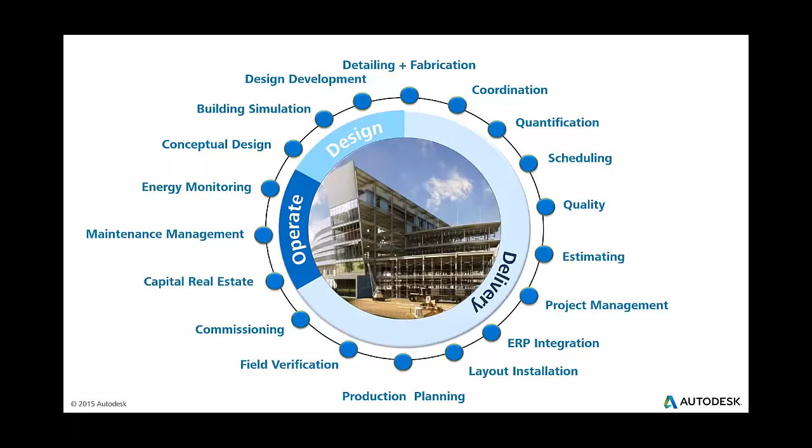When we think about how things function today, there's usually this wheel of BIM, this logical process of stuff moving from stage to stage. Our customers do the same things here, and you can have a lot of different people involved in projects—this is actually 14 different customers associated with this particular project, so a lot of stuff going on. Ultimately, the way it works is like you've got a car that runs on IT labor and expensive hardware—that's basically how the data gets shuttled around. So the system itself is fundamentally pretty broken.

We've gone ahead and tried to address that problem with Collaboration for Revit. The first fundamental problem we've tried to solve is providing access to that information, that data, across the project team, whether they're inside a particular network or not. So let's keep drilling into that.

What we've done is changed the fundamentals of how Revit functions in terms of interfacing with the place of record for a particular model. Today, 99.9% of the time, if I'm doing a Sync with Central operation, I'm a machine running Revit inside of a network, talking to a network store or a Revit Server running inside of a network.

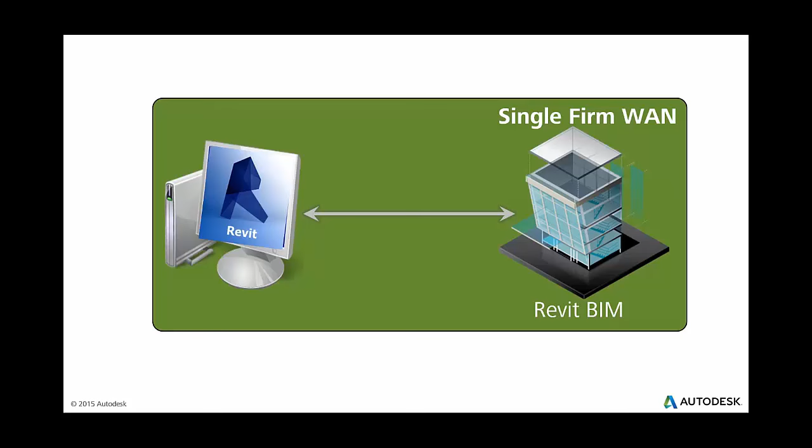What we're changing is we're taking that model and putting it in the cloud—that's the service A360 Collaboration for Revit. It's a modern cloud service built by Autodesk to manage those central models for the entire project team. At a fundamental level, it gets technology out of the way and allows you to have a team architecture where it's not so much about the network conditions you have as it is about how you want to work as a team. So individual sites from a single company could work on the same sets of models without a lot of barriers, or entire multi-firm teams can work together.

In terms of the value that's delivered, first and foremost, it's cloud work sharing—multi-firms concurrently authoring models together.

Beyond that, one of the things our customers have told us—Revit Server is a product that we as a company, Autodesk, don't charge people for, but it's not free, because you've got to maintain servers, pay IT people to maintain those servers, keep stuff updated, update clients with INI files, stuff like that. We were looking for the types of experience you get with something like Dropbox or Box. Most of the time, if you use Dropbox, you don't have to type in an IP address—you just use Dropbox and it works. So we tried to have that kind of existing user experience.

And then finally, the building information models for the project are now located in the cloud, and they're accessible for other cloud services for really useful things. So that's also a value that we delivered here. We think that's really exciting in the long term, and you guys can see in the short term some of the value we can extract out of that when we talk about the A360 integration that we have.

Diving into some of the technicalities—we'll talk more about this in Q&A as well as the demo, but I always like to get through these things at a high level so everyone's on the same page. We've done a pretty big investment around getting the data to the machine before it's needed.

So we do this intelligent data caching. What it means is you have a little process that runs on every user's machine—we call that the Accelerator. What that does is, via deltas, we're never pushing full models across the pipe other than basically the first time you open them. Once it's been opened on a machine, you're transacting in the form of deltas. As others are submitting changes to that place of record for the model—the cloud work-shared model—the deltas of those changes are being prefetched by this Accelerator process. So you're really only working on data cached, and you're only transferring across the pipe those deltas.

So we think that can help improve performance. Looks like my webcam just went off here. Let me do a tech check. Bear with me for just 1 second, guys.

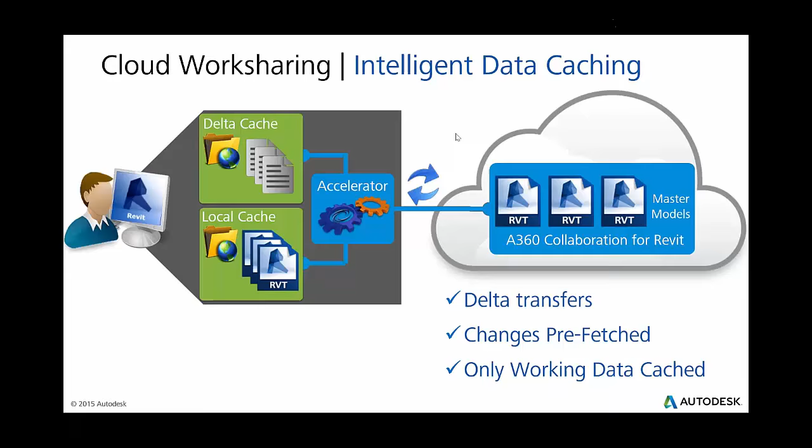So we talked about the data caching that's there. A couple other things to talk about. The first and foremost is the service, the way it functions today, functions under what we call a high-trust workflow. Basically what that means is it's designed for highly collaborative projects where the actual models being authored are being authored by teams that trust each other not to do nefarious or overtly dumb things.

So if I've got a project team together and the structural models are there with the architectural models and the MEP models, if I'm on the architectural team, I could technically open an MEP model and start moving some ductwork. If you're in a project where the dynamics mean you don't trust the architect not to do that, which is kind of overtly a dumb thing, it's probably not the right service for you today. Clearly we recognize there's a desire for that, and over time you'll see a lower trust model delivered here.

But right now, just for full disclosure, it works under a high trust workflow. For the teams that work in that highly collaborative manner, we found it's perfectly viable for them to get their jobs done. And because of that high trust model, at least as designed out of the box, you're basically doing a live link workflow as well. There's a pretty straightforward workaround if you really hate this, but as designed today, you've got the central models linked amongst each other. That's just how that system functions, and I want to make sure you guys are aware of that.

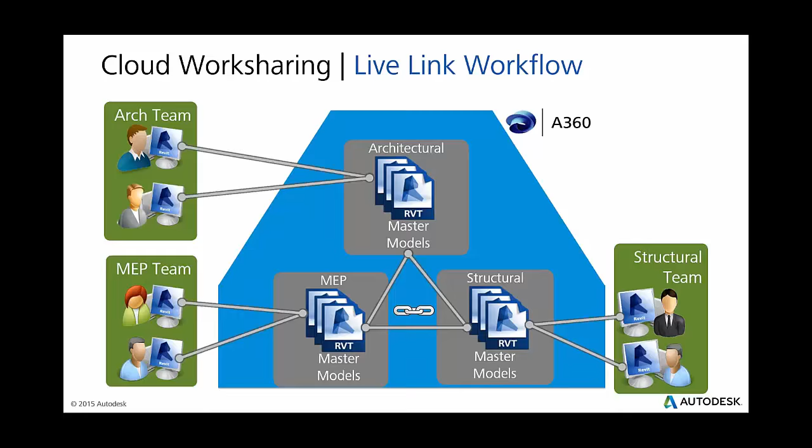And definitely moving forward, we've got a plan to make a much better workflow where you've got major published models that are linked between different teams and stuff. So that's something we're working on, but that's how the service functions today. Once we get into demo, you guys can pepper us with whatever questions you actually have.

The other thing is right now you can use A360 Team, which we'll talk about in a second, to actually contain things like DWGs and other stuff, but it doesn't currently sync down for you. So in many ways you can work directly in Revit on your cloud work shared Revit models, but if you're linking in DWGs, you need to use other means to get those things locally. There really isn't the idea of a cloud link of a DWG file or your Keynote files or stuff. Rest assured, that's something we're working on moving forward, but in terms of the very first release of this service, that's how it functions today.

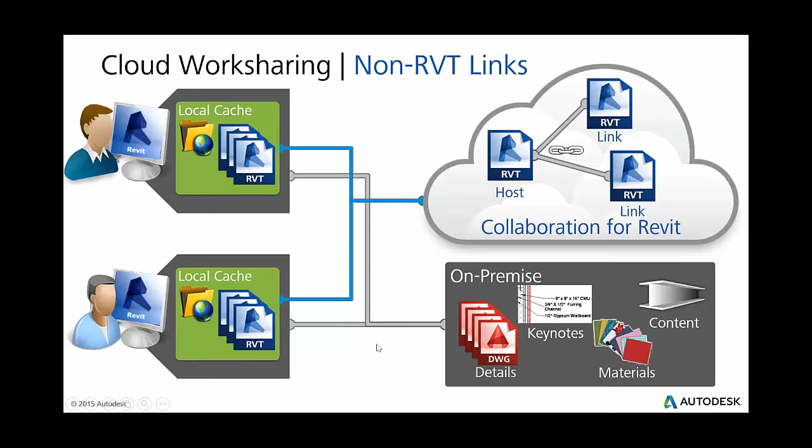So those are just my caveats. As the product manager or marketing guy, I hate making these slides, but it's the reality of how the service functions today. Rest assured, we have a really well-resourced team working to improve some of these things. But I want to make sure you guys are clear on how the service functions, and when we get into the demo portion, you can pepper us with questions.

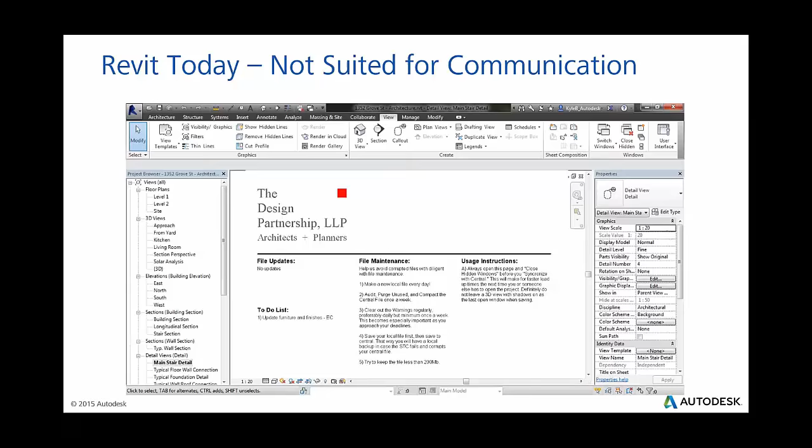Along with providing access to the data, we also want to enhance communication amongst the team. Today people do crazy things like use detail views in a particular central model to post updates for everybody else to read. In a world where I've got like 8 chat apps on my smartphone for communicating with people I know personally, it's kind of insane that you're using a drafting view in a BIM platform to communicate amongst the team. We can do better than that, and there are a lot of companies that do better than that. They provide communication systems that allow people to communicate in real time, but at the end of the day, Autodesk technology is one of the few pieces of consistent technology across the entire project team.

If you're thinking about this as your individual company, yeah, you probably have your own chat system, but it's very rare that every single company on the design and construction team has the same communication system outside of email and phone, which is why that's the lowest common denominator. So Autodesk and our products are really one of the few consistent pieces in the tech stack. So that's reason one why we're kind of investing in here.

And the second piece is when you're using our authoring tools, we can understand what you're working on, which means we can make it really simple to connect with others working on the same thing. And so it all comes together with an in-product chat tool. I can demo that in a second, that allows synchronous communication, so real time. It's not like email where it's like, hey, I sent you a message and get back to me whenever it works. It's an instant message, so there's an expectation of instantaneous communication.

The tool also knows who you are and what you're working on, so it's able to understand, hey, you're working on this model, which is part of this project. Here's the other people in that model right now. Here's the other people working on models linked into your project, and then here's other people that are online that aren't working on your project, that idea. So that contextual awareness we think is really powerful.

And then finally, we've integrated an activity feed, or the timeline as we call it, into the actual communications tool. So you're seeing when people are syncing with Central, get a little animated icon when that happens. We'll demo that in a second. So that's kind of a pretty cool tool in that it's connecting the team, and it's also making available information about who is doing what when.

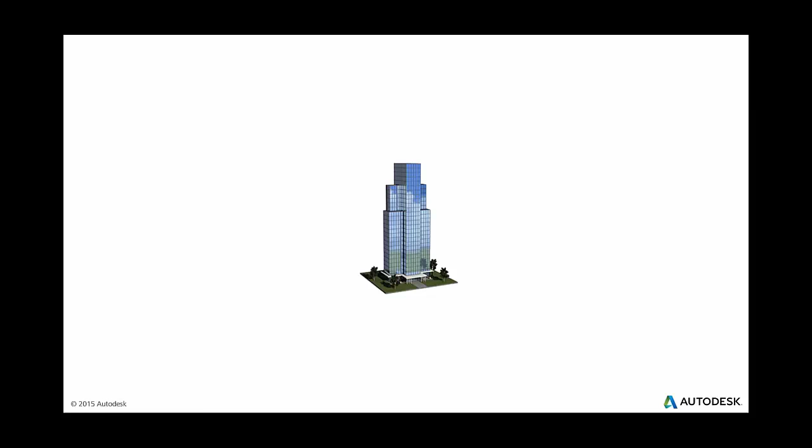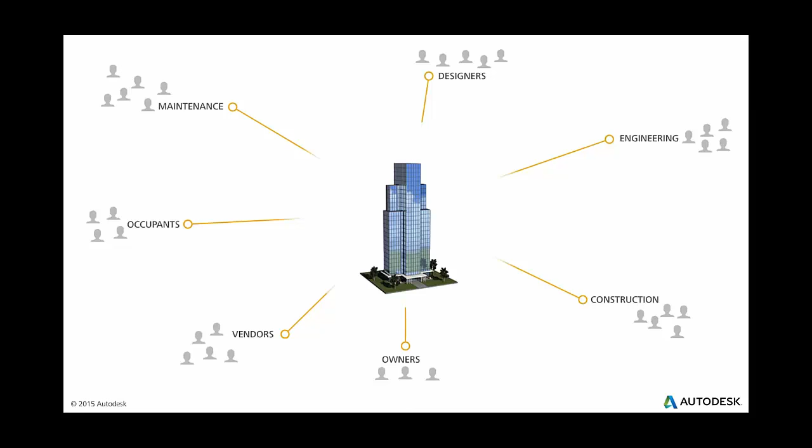So traditionally, Autodesk, we only talk to the designers and the engineers on the project team. But there's a lot more people on the project team. And they're not typically using our stuff unless they're interfacing with PDF outputs, or they're part of screen shares where some Revit person is driving. So there's a much broader project team. And it's not just BIM data, it's a ton of different data. It's a whole boatload of spreadsheets. It's all kinds of PDFs. It's all kinds of Word documents. It's all kinds of stuff. And that stuff is not typically touched by our services.

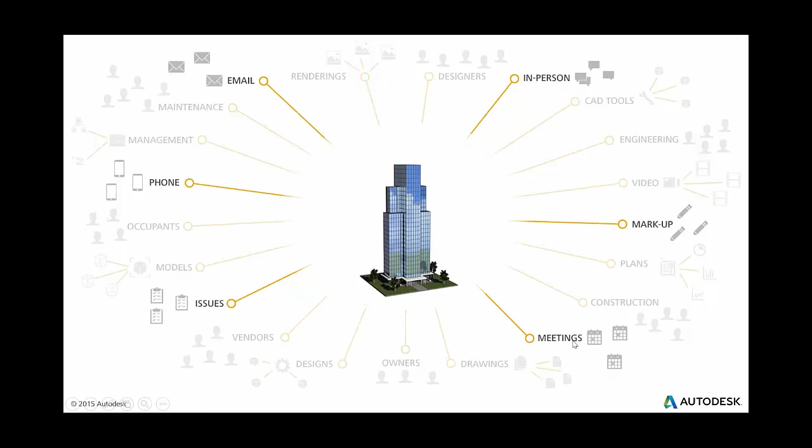And then it's not just that; there's a lot of activities and interactions going on, people talking, people marking things up, people having phone calls, and A360 Team is all about centralizing all of that information. So we like to think it centralizes the people, the data, and the activities, and it puts the project at the center of that. And that's really the key value we think of here.

I mean, there's a lot of tools out there that do this sort of thing, but typically the anchor is like a folder. You know, the file folder as an analogy to contain all the stuff, it's just the data. It's not everything. And the project is really that anchor within A360, and we're excited about that. We think it's a powerful thing.

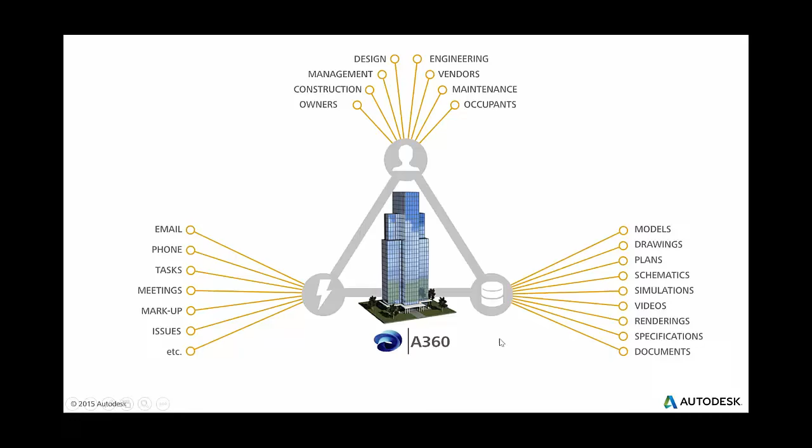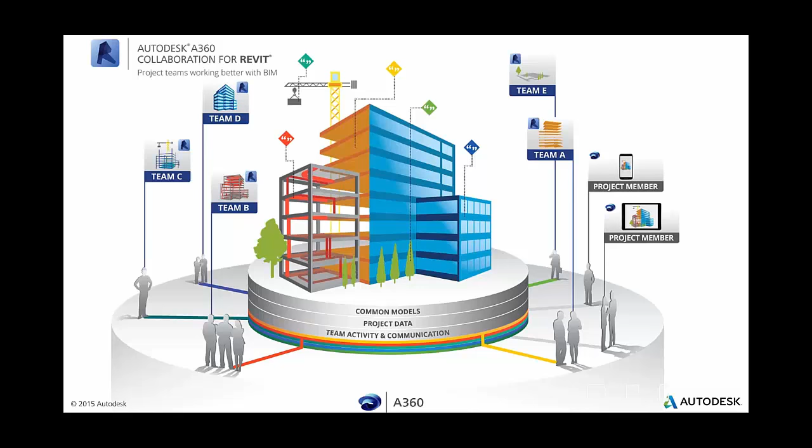And when you add on collaboration for Revit, we now have cloud work shared models that are playing into that system. We have the ability for people to chat with each other, at least inside of Revit for now. So that adds even more value.

So let's talk a little bit about the actual A360 Team experience, knowing again that we can demo when you guys have questions. You know, we like to think you can share, view, and search any of the data in the project without requiring specialty tools. So without having Revit on your machine, as long as you have a modern web browser, you can go ahead and start viewing Revit models on your web browser and flying through them and making comments, eventually doing things like markup, and also searching.

So as we get the data ready for viewing on a web browser, we're also cracking open all the elements, dumping all the parameters into a search index so you can start searching stuff as well. And so we think that's really powerful in the longer term.

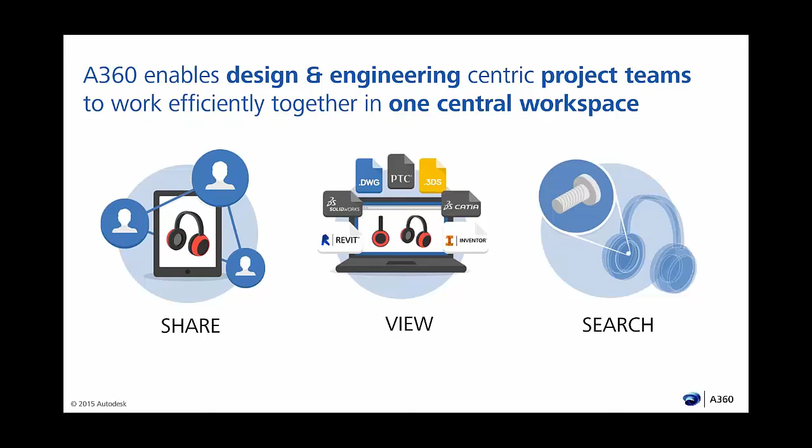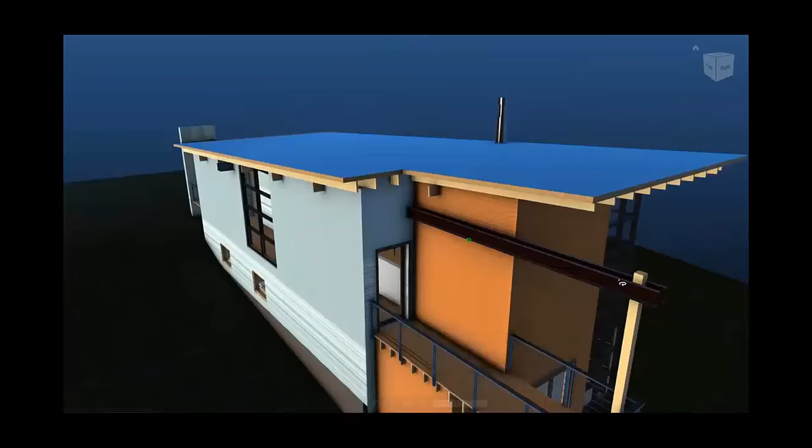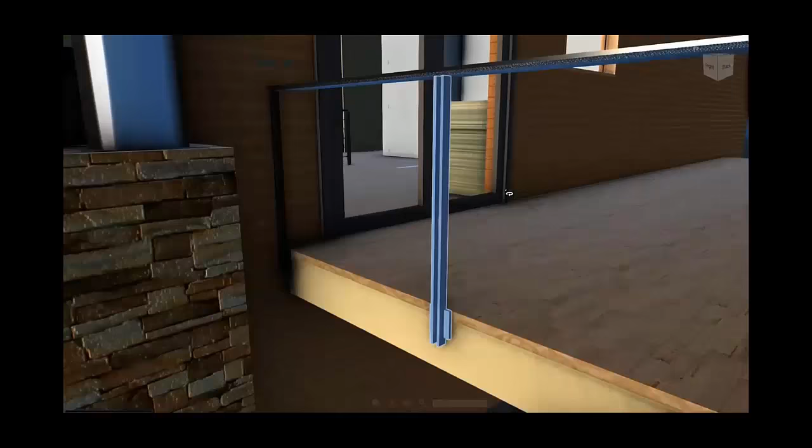Moving along here, this probably won't translate well, but I've got a little video here that is actually the experience in viewing. I'm going to demo this in a second, but I just love this video because you're in a web browser, but it feels like you're not. Yay, modern technology for allowing smart dev teams to build these types of experiences, but you can drill into individual elements, you can see the properties, and you can even load up models like this, which, thank you very much to the Beck Group, one of our customers, is one of their BIM building information models.

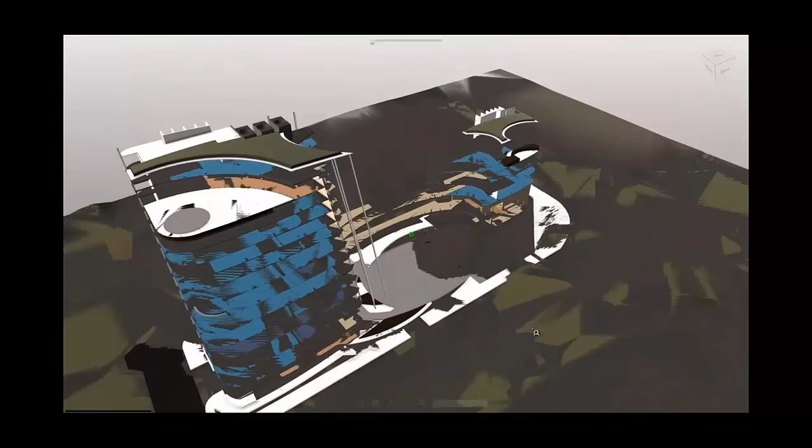There's 54 million polygons in Canvas. So if you've never had a reason to get a 64-bit version of a web browser, this web viewer may be the first reason for you to do that, because you can load up huge scenes and actually render them and make it look gorgeous. So we're really excited about this technology. And we think the idea that anyone on the project team can be engaging with the model with this kind of a rich experience without requiring them to be dangerous in Revit, so to speak, is really powerful.

So let's talk about how Collaboration for Revit works. We used to call it Skyscraper, I slip sometimes. The way the system functions today is when you do your initial sync with Central, you get a version on A360. As teams are syncing with Central from there, you actually don't get a version on A360. You get it when you push a version out there. So you go to your Manage A360 Models dialog, you hit the little button, and that pushes the data through what we call internally our derivative service. It's the thing that makes the data ready for viewing on your web and mobile device. And so that's how the service functions today.

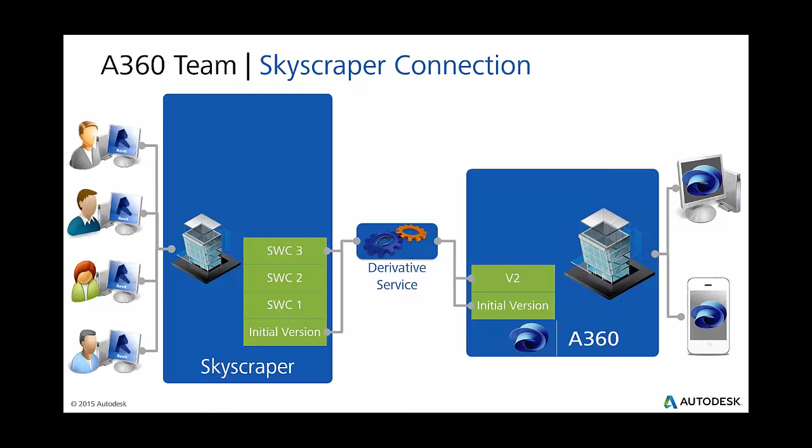In terms of the project structure, typically a single company will have a hub. It's kind of a site, the actual domain or URL that you go to that contains the project. Within that project, you have members and contributors. The members are host company employees who are members of that hub, people that the host company is paying for to be part of the A360 project. Then you've got employees of other companies that are in there as project contributors. It doesn't cost any money to include somebody as a project contributor. So if you're the firm hosting the project, you can invite everybody from all your consultants, and it's not going to cost you any more to have them working in that project.

And then there's host company employees who are just in that project. So along with those project members who are paid, you can have people in as project contributors. The big difference is if I'm a contributor in a project in a company's hub, I can't see any other projects in that hub. So if I'm part of the MEP consultant, I only know that this project exists. If the host company has 50 other projects that may have confidential stuff, I have no ability to access them. So that's the traditional project structure.

Moving from there, there's three things that we've brought together: accessing the project data, enhancing communication, and connecting the entire team. And all those three things come together for A360 Collaboration for Revit. So for those of you wondering what this thing is, that's what it is. Now we're going to talk a little bit about some of the capabilities, do a bit of a demo, and go from there.

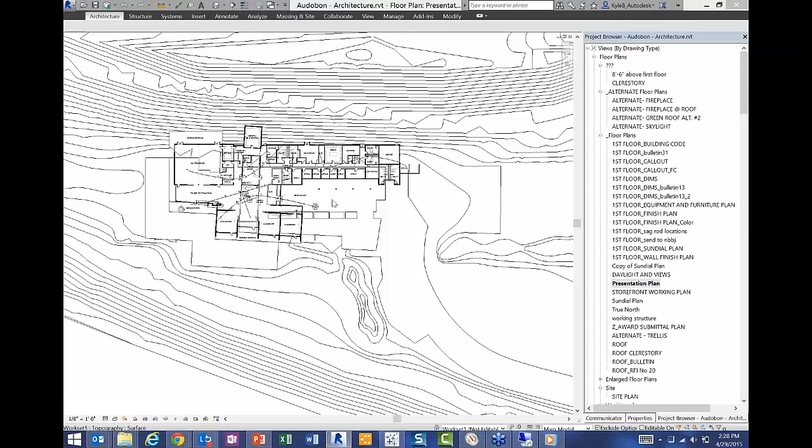So anything else, Bud or Nisha, before we get started in the demo here? I think the rest looks pretty good. Okay, cool. Well, keep asking questions, guys. Like I said, we got a deep bench today, so you guys can probably get your questions answered before it even gets to me. So let me minimize this.

So this is a version of Revit 2015 that has the add-on for Collaboration for Revit installed. So just as a general note here, this service runs on effectively the bleeding edge of the released code for Revit. So to make it work, you basically have to have the latest update release of Revit, so the latest Revit code for 2015, plus the add-on that really makes this magic happen. So over time, I think that's going to start to change, but right now, we're developing with updates every month, and because of that, you need to make sure that you're on the latest code for everything to function. But that aside, it's a regular version of Revit.

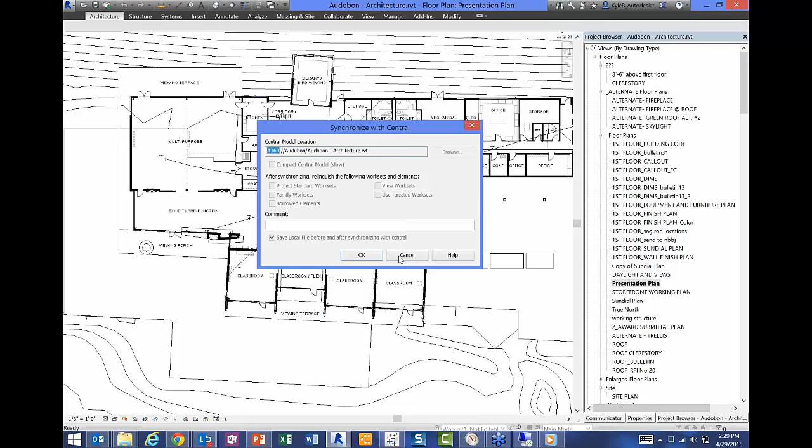I'm actually working on a cloud work shared model here. So how can I tell that's a cloud work shared model? If I go to Synchronize with Central, the path is going to show up as A360. So I'm actually in a cloud work shared model. If I wasn't in one and I wanted to join one, I could go ahead and do that pretty straightforward. So if I go File Open here, oops, double click, my bad.

There we go. My file open browser, I'm going to see an A360, the cool whip icon as I lovingly call it. And what's going to happen there is basically you're going to ping into A360 Team and ask, hey, what hubs am I on? What are the projects in that hub? And then it all gets grouped together in this list. So this is for Kyle Bernhardt. This is for my personal Autodesk ID. These are the projects I'm in.

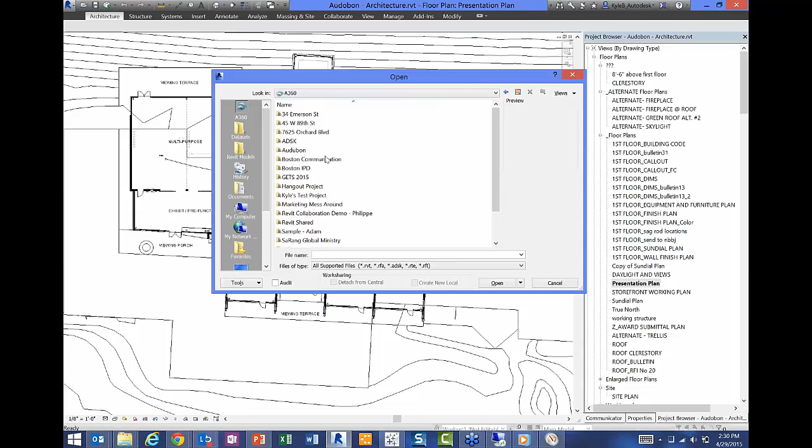So I could drill into any one of these projects. These projects contain cloud work shared models. I happen to be on the one inside of Audubon. That was the one I picked, so I only have 2 cloud work shared models up. Looks like one of our sales guys added a 3rd one, but regardless, that's kind of how it functions. So I don't really have to care about network paths or anything else. I just hit A360 and it's going to tell me what projects I have. So that is also a common question we have with people that are familiar with Revit Server.

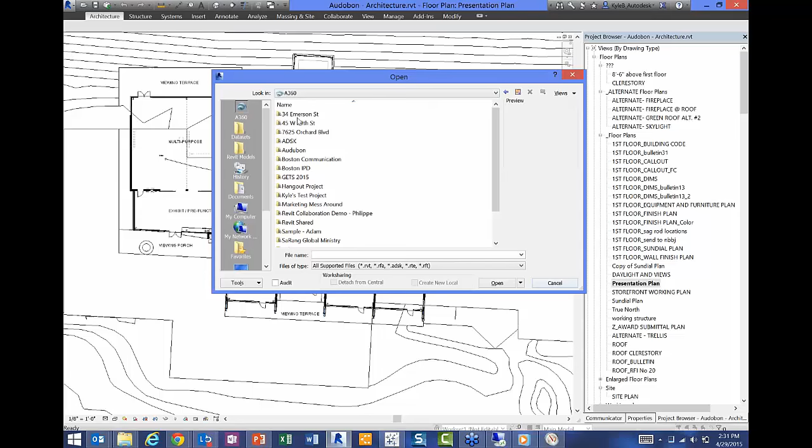A360 allows you to control who is a member of a project. So if I'm working on one project for a company, I can't view, see, or literally do anything with any other project going on in that company unless I'm also a member of that project. So you've got, not super fine-grained, but pretty good control over who can see what data. So that's what determines which projects show up, and I can open up models from inside of there.

If, for example, I had a local model, and I'm going to shoot from the hip here a little bit, so bear with me. Whoops, wrong one. So if I'm going to go ahead and open up a project, back to file open, let's see. I'm going to open a local version of a model.

So right now I'm locally opening a model. This just sits on disk here. If I wanted to get this thing up into the cloud, a common question is, hey, how do I get it there? Can I just upload it to A360 Team? The answer is not currently, and the reason why is we need the Revit application to get it up there right now. There's opportunities in the future to potentially change that, but right now you've got to use the Revit application. So it's a one-time deal to get it up in the cloud.

So after this model locally opens, I'll show you that workflow, although I won't go through the motions to get it officially up there. But people always ask, how do I get the data? So let me show you guys that as we go. So this is a local model. It's finally loaded, it looks like. Almost. There we go. So it's finally loaded here, and we're going to go ahead and collaborate and push this thing up into the cloud.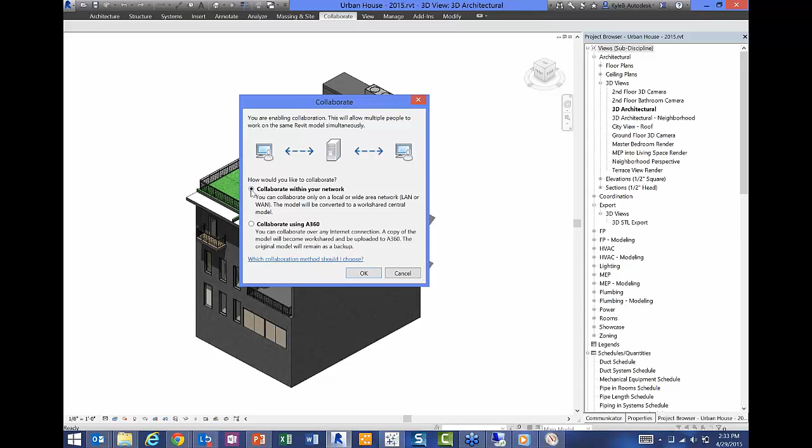So what we do is we go to our Collaborate tab, which is where you go to start worksets historically on a model. But with this service, there's a bit of a change. So you see this option that's called Collaborate. And I've got to hit this button before I can enable worksets. And so the way this works is we kept the existing functionality as is. So if I keep the radio button checked for Collaborate within your network, that's worksharing like it's always been. Nothing changes at all. If I choose to collaborate using A360, this is the fork in the road where we've gone down the fork that says make this a cloud workshared model.

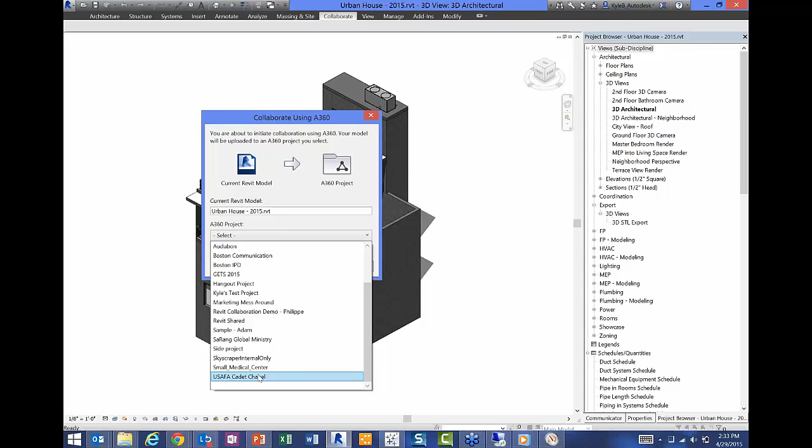So when I hit select, this is a list of all the projects that I'm a member of. Doesn't necessarily have to be projects that have Revit models or cloud workshared models in them. This is just the projects that I'm a member of. So I'm going to say Kyle's test project. If I hit initiate, that's going to start the process of enabling worksets, uploading the model to the cloud, creating a cloud workshared model from that, and then getting a local cache working for me as a user. So that's kind of the whole process if I hit initiate. I'm not going to demo it, but hopefully you guys get the gist.

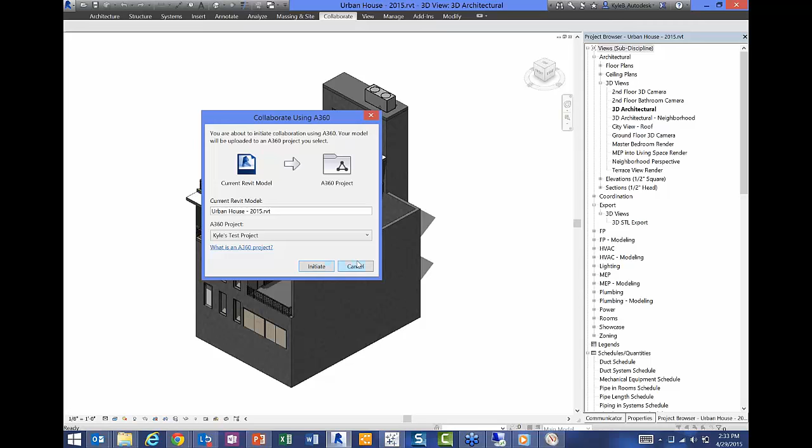So the process is I'm going to do that for all the models in my project if I'm migrating a project. Once I'm done, I build linkages between those models. So, assuming this model is called Audubon, there's an architectural and a structural model. If I'm migrating that project up to the cloud, I would go one at a time, migrate the structural model, migrate the architectural model, and then since there were links before, I need to remap those links because they used to be local links, and with Collaboration for Revit, you need to have cloud links. So there's no local Revit model linking with Collaboration for Revit. You need to use cloud links.

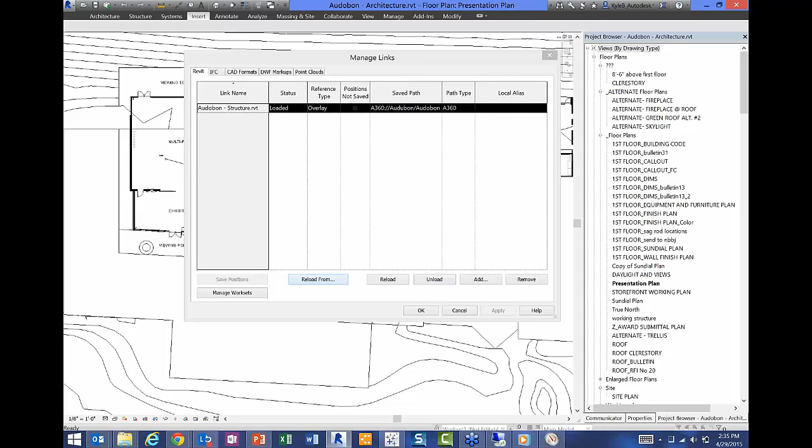And so the way you do that is you get each model up into the cloud, and then you hit Reload From. And then from there, you're going to be presented with all the models in your current project, and you select from that one. And that's effectively going to create a cloud-to-cloud linking between the current host model you have and the link model. And so that means that anyone on the project team, no matter where they are in the globe, as long as they have an internet connection and they're signed into Revit, they can start working on those models. So cloud-to-cloud links are awesome because you don't have to worry about paths anymore. It all just kind of works. So that's that piece around linking and getting models up there.

So I'll stop here, Bud. Are you seeing any questions coming in about the whole getting models into the cloud topic that you'd like to cover before we move on to other topics? Right, yeah, one of the questions was how do the links get updated? Do they update dynamically, or do you have to do anything to update the links?

Yeah, it's a great question. So we haven't changed the functionality in Revit to handle that. So the way it functions is in a traditional workflow, you're linking central to central. So if I'm working on a host and I've got two links, right when I hit model open for the very first time, that is when I load the latest version of those linked models. And that Accelerator would have already prefetched the deltas so that it's a local operation to build a fresh state of each of those links.

And then I'm working on that state of those links for the rest of my Revit session, unless I happen to hit the reload option. If I hit the reload option, that's going to then force a reload of the latest state of the linked model. If I sync with Central, that doesn't reload links. So syncing with Central doesn't reload the state of links, only hitting the reload button does.

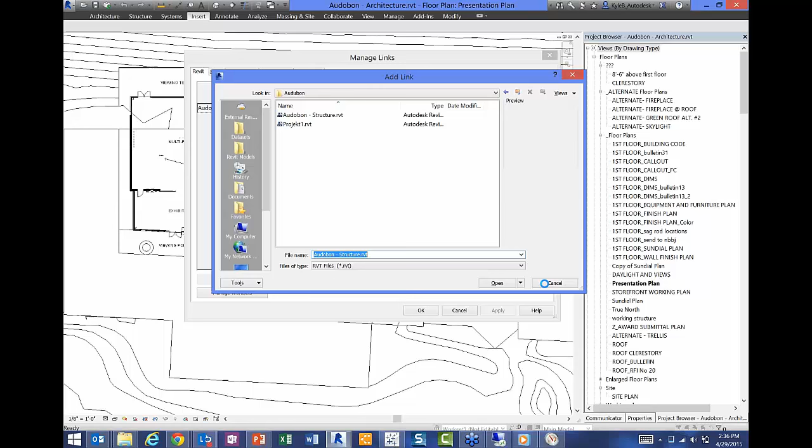So as a general rule, you're always getting the latest version of your links when you hit model open. And like I mentioned earlier, there's some cases where you may not necessarily want that given the dynamics of the teams and the project. And in that event, what you end up doing is you have a dead version of a model that is linked in.

So just to give a concrete example, because we're demoing, let's demo here. If you hit Save As, that creates a detached local version. So if I'm the architectural team and I want to cut a version that I want my structural team to link in, I'm going to go ahead and hit Save As. I'm going to bring that locally, and then I'm going to initiate collaboration and onboard the model back up with

a different file name. And the version that I just brought back up, my architectural team isn't going to work on. The architectural team continues to work on Audubon Architecture, but there's a new version called Audubon Architecture Link that the structural team links in. So the structural team now has a static target that they're linking in.

It's not going to change until my team says, all right, I've got my architectural model, the live version, at a state where I'm going to save as again. And then I'm going to onboard that new version up, architectural link again. And then that's going to replace the old version that was there, that dead link, and then the structural team sees it update.

So, is it super smooth and integrated? No, not yet. We want to get there. But quite honestly, it's probably no worse than taking a version and throwing it up on an FTP site once a week. So that's the function around links. So any questions on that? Do we see anything coming through the wire to drill into that?

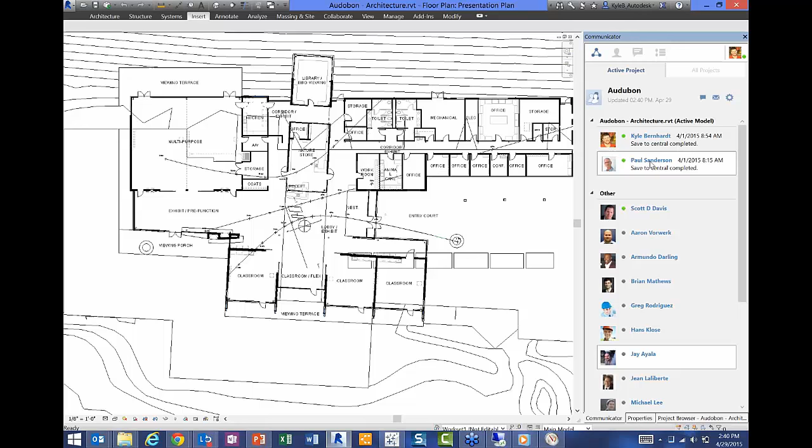So over on my other machine that I've remoted into, I can switch over to him, and I'll do that in a second here. So Paul's in the same model as me, and here's the other people in my project. Only Scott Davis, one of our technical sales folks, is currently online. So if I see the green dot, I can reach out and chat with someone. I know Paul's there, so I'm talking to Paul. Paul, I'm about to make major changes.

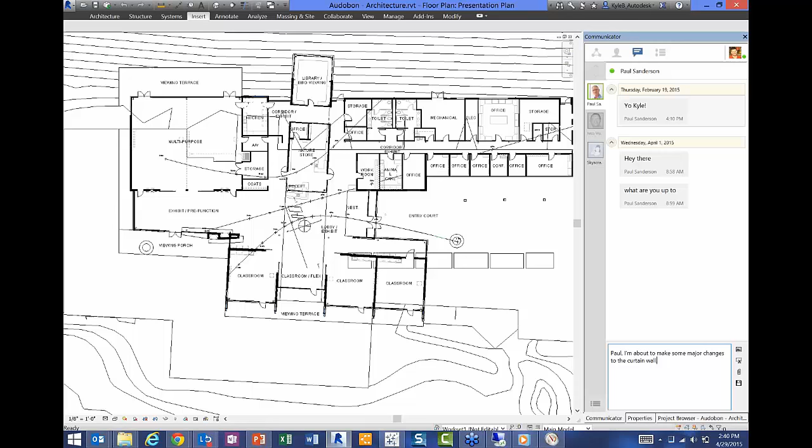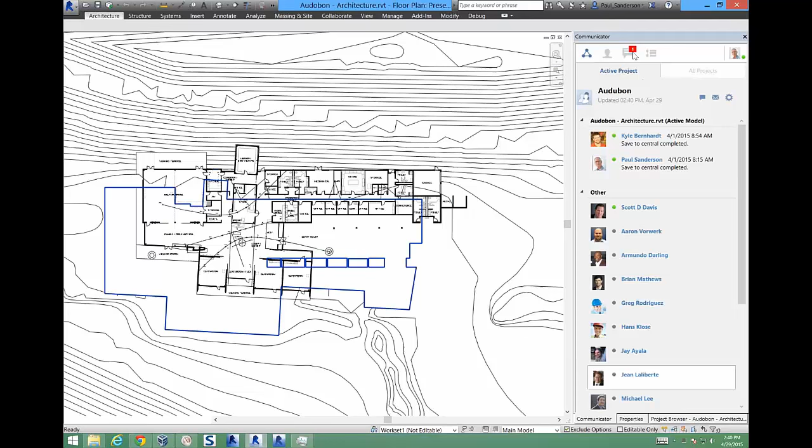So I send a little chat message over here. If I switch over to my other machine, I'm now Paul Sanderson, you can see up top, and I've got a chat message waiting for me. It sees that I'm Paul, inside of this model, and there's a chat message waiting. Click on the chat head, and there it is. So you can chat back and forth. That contextual awareness is pretty straightforward.

The other cool thing I want to show real quick is the process of syncing with Central and that activity feed. I'll show that right now.

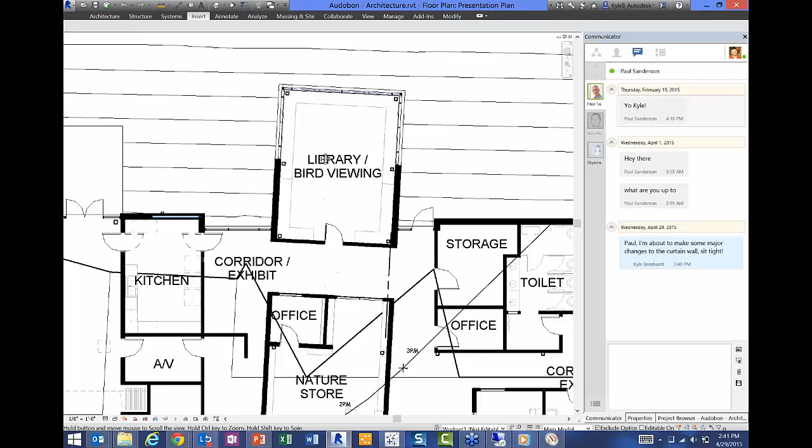I said I was going to make some changes to the curtain wall, and since I'm a mechanical engineer and not an architect, you don't want me to do that, but I'm going to do it anyway. Let's make some changes, changing the curtain wall from a storefront. Let's see if I get another one. Storefront 2. Hopefully this doesn't break too much. So I'm winging it here.

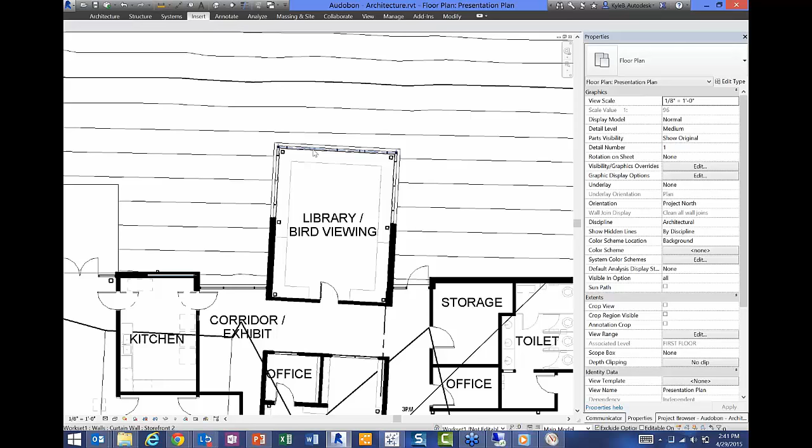So I've changed the type of that curtain wall, and I want to submit it. The same workflow applies as traditional Revit work sharing. I need to sync with Central, and I can choose whether or not to push stuff in. I can also leave a comment, and I'll show in a second why that matters.

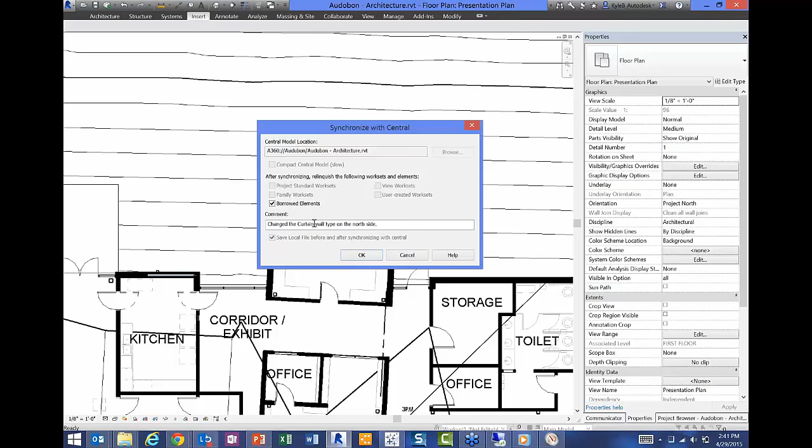I've gone ahead and triggered Sync with Central, and now Revit starts transacting with the cloud. If I fire up Windows Resource Monitor, aside from sharing my screen, you can see the bandwidth associated with that, I'm seeing that Revit has now started transacting with the cloud. That's not something inside of my machine, that's Revit connecting with and communicating across the cloud.

The cool part about this: if I switch over to Paul, Paul knows that I'm syncing with Central. This is a nice little improvement I really like. You see this little animated icon next to the timeline? That tells me that someone in your model is syncing with Central at that very moment. If I click over to that timeline, here's my Sync with Central history. You're seeing that Kyle is syncing right now, and here's the comment he made about it.

We really like this, and customers are really liking this idea of more open communication. The cool part is this isn't limited to people in your company. Of course, there are perfectly good reasons why maybe only people in your company work on a given model, but technology isn't in the way anymore. You could have a sprawling team across multiple companies and networks, all communicating in the same way. It's exciting stuff, and that's the main part I wanted to show here.

A few other things—actually, I'll stop and take questions that might exist around this Communicator tool before we jump into some of the administrative capabilities of the service. Any questions coming in around the Communicator?

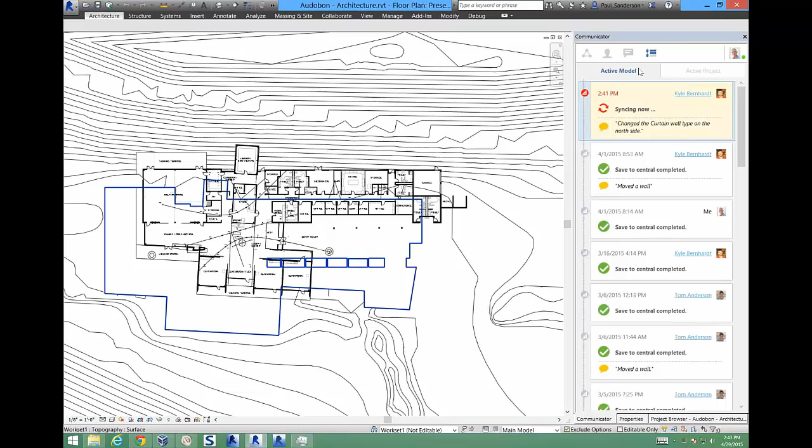That's a great question. The history is definitely contained in a cloud service, and for me as a user, if I sign in to another machine with my identity, you're going to see my chat histories come with me—my active chats and the history. So the conversations are definitely stored in the cloud. Most people tend to ask this question around auditing, having an audit trail around decisions. A lot of times communications around projects need to be maintained under a certain level of stringency.

That is not what we're currently doing. I don't want to oversell it. If I wanted to, I could save it as a text file—I could save a chat history and say, hey, you told me this on this date, here's the chat record for it. So that functions, absolutely, but it may not necessarily be exactly what people are looking for, and we're looking to improve that over time. Go for it.

Just one other quick question, it may or may not be related—I'm not a Revit guy, as you know. The guy wanted to know about dealing with large point cloud data. Does Revit deal with that?

Oh yeah, Revit does handle that, good question. Revit as a platform handles large point cloud data better than any other BIM platform on Earth, that's for sure. We use our Recap technology. I suspect what people are asking is, can I cloud link a point cloud? The answer is no, not currently, and that's a really challenging technical problem.

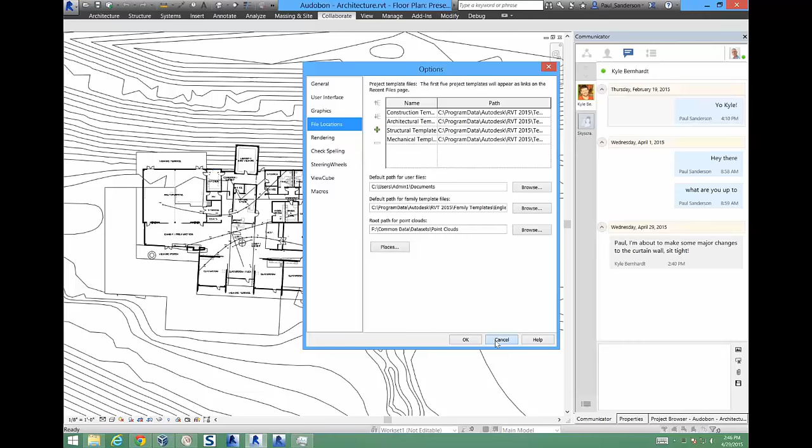Over time we'd definitely like to have cloud-located point clouds, but right now, with point clouds being 75, 80, 100 gigabytes of data in the worst case scenario, we haven't figured out a good solution to stream that data down. Most people don't want to be downloading 80 gigabytes of data across every user's machine. So it's a work in progress.

A couple other things I want to show about the experience here before we talk about the roadmap: we have this little administrative console. I'm working in Audobon, so I can drill into that, and here's where I can do some administrative tasks. We talked about pushing models to A360 Team, so I can go ahead and do that by clicking this button to publish the latest.

But I can also do things like rename my model, view the versions. This is a common question: basically every single Sync with Central in the entire history of the model is saved in the cloud, so you can always restore back at any given time. That's a pretty valuable thing to understand, you don't have to worry about some local archiving system.

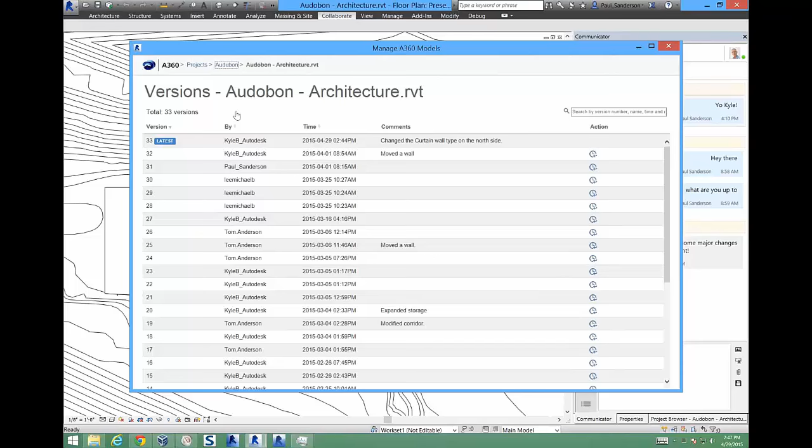As our cloud service provider tells us, the scenarios in which we will actually lose data, a hurricane might come by the region where the service operates and this whole region may go down, but the scenarios in which we actually lose data are ones where you probably don't care about your job anymore, you'd probably care about the future of the human race. So the data's there, the service might just go down if a hurricane comes through Virginia, which is where we're located.

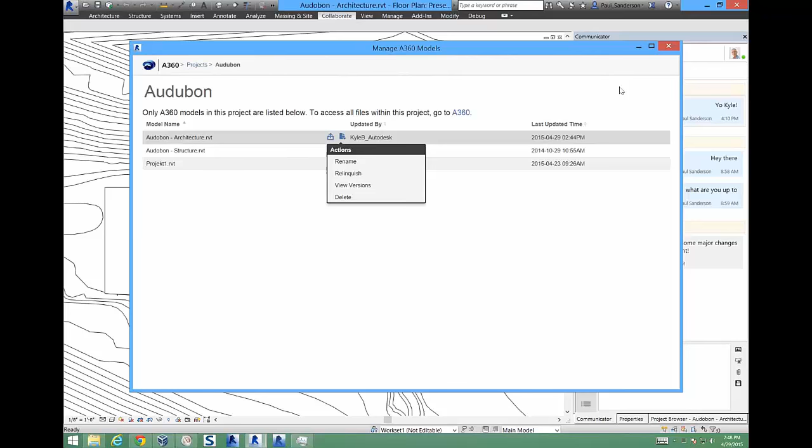This console allows you to do things like delete models, view those versions, restore them, and if somebody's got a bunch of elements checked out that they need to return, you can force relinquish elements from others. That's a little administrative tool.

So that's the core stuff in Collaboration for Revit. One final thing I'd like to show relates to our investments for changes that are coming. I'll jump back into the slide deck to illustrate a couple things. What you've seen is really what we shipped in December, but we've continued to make changes.

A common piece of feedback was, I love viewing my model in A360 Team, but let me control which views I can actually view inside my web browser. We listened, we heard, and we built it. Now there's a button called Views for A360, with a similar interface to choosing views for DWG, PDF, or DWF export. You select the views you want, and those are the things that show up inside the web browser on A360. You asked, we listened, and that came out in our March update.

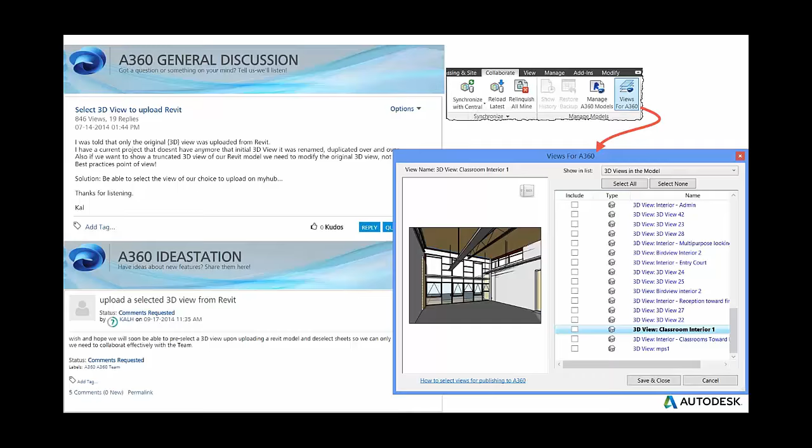Now let's talk about new stuff no one else has really heard about, that's why you guys join these meetings, to talk with the product team. The big thing we're working on is Communicator usage during Sync with Central. A lot of people have told us this Communicator is awesome, I've got some downtime while Sync with Central is running, I want to chat with others on the team. We heard that, so we made a post about a prototype, and we got some great feedback from folks like yourselves about how they wanted it to operate.

I really wanted to have a demoable version of this today, but it just wasn't in the cards. Take my word for it that very soon you guys as users will have a version of Communicator that runs independently of Revit. So you can use it when Revit's syncing with Central, you don't even have to be running Revit to use it. You could install it on your project manager's machine and understand who's working in what model and start asking questions. That may be good, that may be bad, so you can have at your discretion whether you employ it that way. Up until now you had to be running Revit, and if Revit was hard at work you couldn't use the tool, and we're changing that.

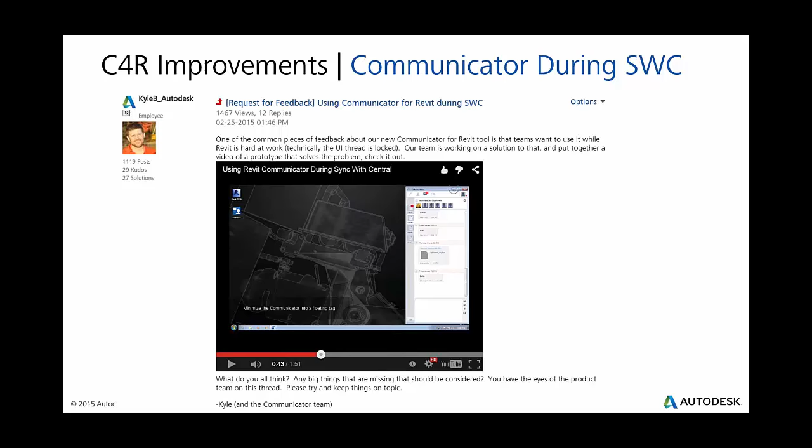So we heard the feedback, and that's an investment that's going right now. As of right now, our plan is to deliver that capability by the end of May. Another big thing is around performance.

Today, the way things function is I do a sync with Central. We have that connection between the service, and then the deltas move over. But today those deltas are transferred in serial. So if I've got 7 different deltas associated with my changes and then another 7 coming down, those things are done one at a time. Revit says, okay, I'm going to download this one, then the next one, then the next one.

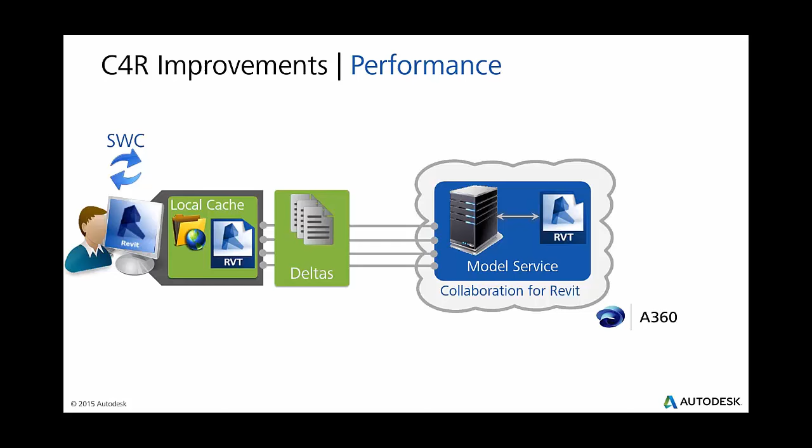So what we've done with our release that's coming out this weekend is we got a bunch more pipes, if you want to think about it that way. So when I do my sync with Central, I have a bunch of pipes to move those deltas back and forth between the Collaboration for Revit service, or C4R. So those deltas are transferred in parallel.

So what does that all mean? Well, by our performance testing, that means a roughly 30% improvement to initial model open performance, and a roughly 20% improvement to a sync with Central command with a large delta that's being passed between the client running Revit and the service that's managing that cloud work shared model. So those are pretty cool stuff.

We know there's still a lot more performance we can wring out of this sponge, and we're working on it. But we're pretty excited that as of this weekend's new version, you're going to see some pretty significant improvements, and our teams have worked really hard on that.

Moving along, another thing we did is we've made significant investments to improve and optimize our little internal jargon we call PAC, Personal Accelerator. Previously, this is a real-world customer model from one of the teams that did our production beta—real-world customer teams working on this service before it was launched. They were kind enough to give us access to their live model, as long as we promised we wouldn't do anything but just load it. And so we did that.

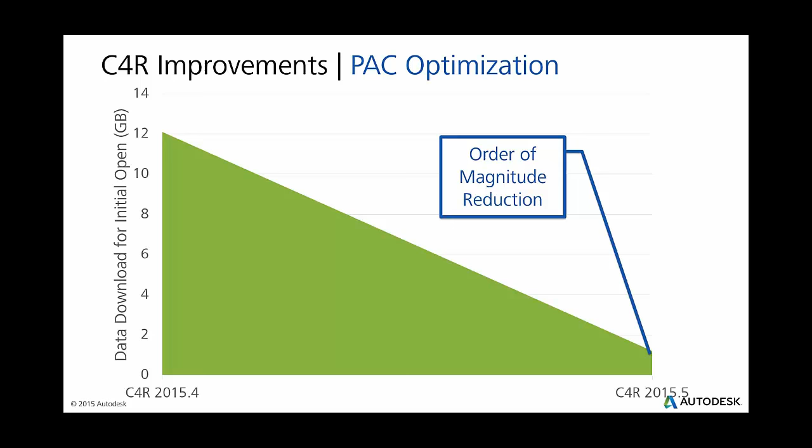We loaded it in Collaboration for Revit, the version that was launched at the beginning of March, and then we've got the one we're about to launch this weekend. We've got an order of magnitude reduction in overall data downloaded per machine, so a huge difference in getting that data up and loaded. That goes along with the 30% reduction in time to get that model open. We're really excited about this one. The folks that care about bandwidth bills and bandwidth consumption across your network will be pretty excited about this as well. So that's a big one that we've rolled out here.

So the final thing—again, these are insights for stuff that's coming out, not stuff that's available yet, but that's why you guys come to the Hangout. I wanted to share it with you guys.

The final thing to show is that when we update, the service will go down for a certain period of time. We try to make it happen in the evening or nights of most of our users. So it starts at night on Friday Pacific time, and the service will be down for roughly 12 hours, then it's back up again. We actually have a web page that communicates this. I'm going to figure out how best to communicate the actual URL to all you participants, but there is a web page that lists this—not just the one coming this weekend, but all the stuff down the road—and we do our best to keep it updated with the downtime.

So again, in the spirit of full disclosure, these things do happen. Also in the spirit of full disclosure, we want to stop downtimes from happening altogether as we update, and that's something that we're working on over time, because we realize sometimes you guys have deadlines. Sometimes architecture and engineering firms work crazy hours in the name of a deadline, and we certainly don't want to get in the way of that. So we're working on that, but in the spirit of full disclosure, that's kind of how things function.

So I think I've got two or three other key things to show about actually purchasing the service, and then we're going to open it up for questions for the last little bit. So everyone always asks, okay, what's it cost? So the way the service functions is you buy it per user. So you could buy 10 users if you wanted to. You could buy 15 users, that sort of thing. And then you can freely allocate and reallocate who gets it.

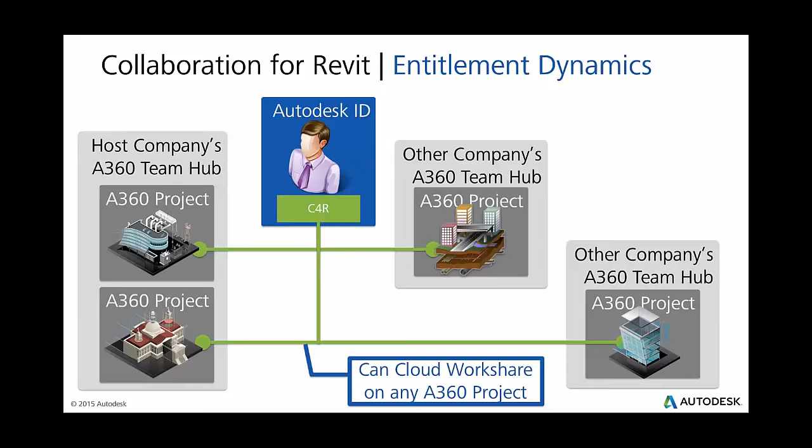So if I've provisioned it for one of my users, that user can go use it on a project in my company's hub or any other company's hub, so long as they are a project member. So in essence, that entitlement follows you anywhere you go in the A360 ecosystem. So if you want to get all this working, you've got to get a Collaboration for Revit entitlement. You need to get a project membership in A360 Team, and you need to make sure your Revit is updated. And if you get those three things together, well, you're cloud work sharing with Collaboration for Revit.

So that's the content I wanted to cover with you guys. Hopefully this has been really informative. Let's wrap it up with questions. So Bud, I think you are our fearless question asker. Let's fire away.

We've tried similar solutions with Collaborate via the cloud and always get central file access errors as multiple users try to communicate with the central. Are these still going to be the errors of C4R? I guess my answer to that is, boy, I hope not. That's part of the whole reason we built this, is to have rock solid access. And so I guess the best way I can answer that question is as follows.

Before we released this service commercially, we had six different project teams, so roughly about 20 different companies working on a total of six projects using the service. We granted them free usage of the service, and we did not require them to keep using it. They had to give us feedback, but if they said, you know what, I had corruption, this is slow, for any reason, they could just take their models locally and go back to doing what they were doing.

Not a single one of those teams has chosen to walk away from it. So that's the most effective way I can answer that question, because I'm a biased Autodesker if I give an answer any other way. Next question.